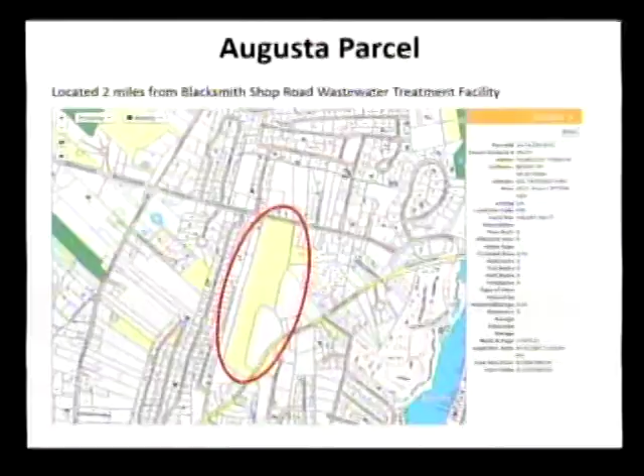One is the town purchased some years ago a 20-acre piece between Brick Kiln Road and Route 28 next to the Falmouth lumber yard. It's called the Augusta parcel, because the Augusta family owned it. It was purchased partly with land bank money and partly with town funds, and the premise was that it would be usable as a discharge site or a pump station, whatever future sewering in the Acapesket Peninsula would require.

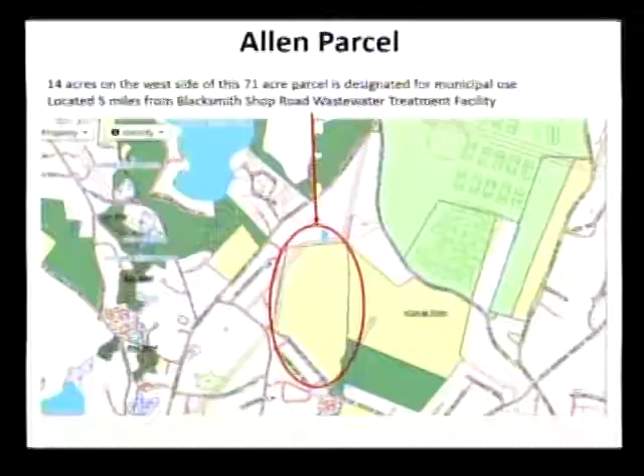There's another site further out, I think about 5 miles from the treatment plant, up near Hayway Road and Carriage Shop Road. It was called the Allen parcel. Mildred Allen sold it to the town for a good price. It was part of a larger parcel the town bought, but 14 acres of it was designated for municipal use. The rest is for conservation. So it's theoretically available for this municipal use.

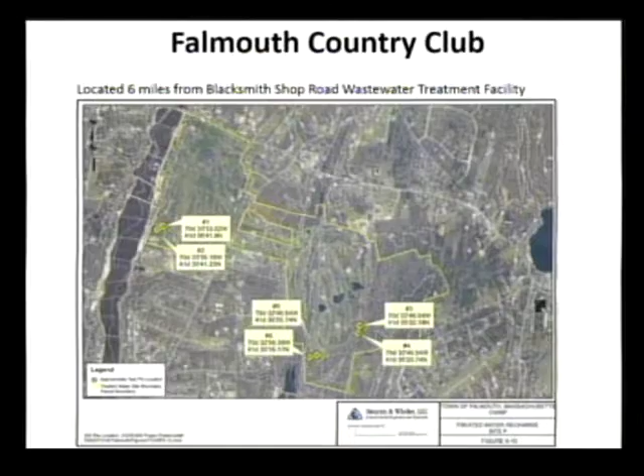The third one is the Falmouth Country Club, which was bought with a combination of land bank money, community preservation money, and town money, partly for recreation, but also with the premise that it may provide a site for some kind of discharge of treated wastewater. This one is 6 miles from the treatment plant. There are others that have been looked at, but those are the three that have gotten the most attention and the most study.

We're here today to talk about two other discharge sites that have not gotten much scrutiny from the town at this point, because they are not in the town. The first one is Joint Base Cape Cod. We're very lucky to have Ed Leonard with us. He's the reason we changed the date, because when Ed could come is when we decided to meet. He's been doing a study for the four Upper Cape towns, funded by the state of Massachusetts, to look at the facilities there, what use they would be to the four towns, what it would cost, how it would be managed, and what the prospects of it in real time are.

So, Ed, you have the floor. Do you want me to go up there for the microphone? That would be fine if someone else can run this clicker. If you prefer sitting, we could move this for you. Doesn't matter to me, I'll do whatever you guys want. Whatever's good for you. Well, let's do this then, because it's easier to see everybody from here.

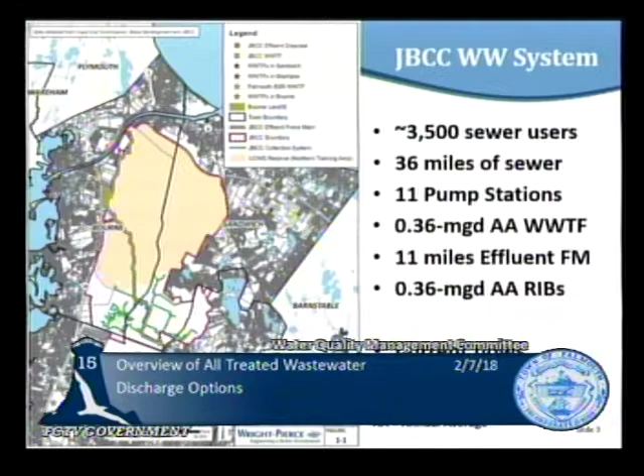Joint Base Cape Cod is about 22,000 acres, bounded by the purple area on the figure here. Of that, about 75% is called the Northern Training Area, which is basically an environmental designation, so without an act of the legislature, it's really challenging to do anything in those acres.

That's about 16,000 acres. The base itself was built prior to World War II for 70,000 troops, so it has a pretty extensive collection system, 36 miles of sewer, 11 pump stations. Things are really spread out on the base.

The original treatment facility, built in the 40s, was a 3 million gallon per day treatment facility. In 1991, that was replaced with a 0.3 MGD wastewater treatment facility. That facility was then upgraded when the Barnstable County Jail was constructed, so the current capacity of the treatment facility is 0.36, or 360,000 gallons per day.

There's an 11-mile force main. The treatment facility is located in Sandwich, actually, and the force main runs through the cantonment, which is the developed portion of the base, through the Northern Reserve, into Bourne, and up to about halfway down the canal.

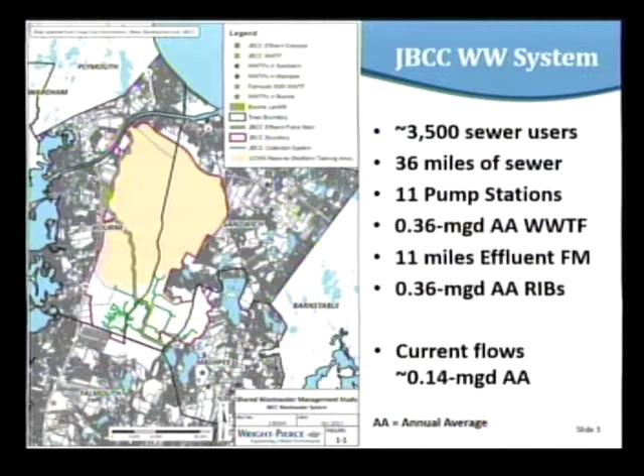So it's on the base, southeast of Service Road. There's no abutters between the rapid infiltration basin site and the canal itself. As I said, those are in Bourne, and those have a 360,000 gallon per day capacity as well.

And those numbers are all on an annual average basis. So the current flows are about 140,000 gallons per day, which means there's only about 220,000 gallons per day of capacity. Each of the towns is looking for more than that in terms of capacity.

So the goals of that project were to identify costs for a shared wastewater approach, and then to confirm whether or not each of the towns individually had interest in continuing to pursue that as an approach.

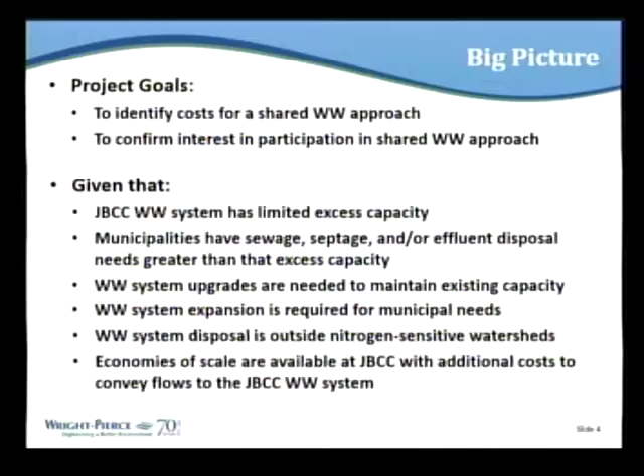Given that there's limited excess capacity, and each municipality has a different set of needs, whether it's sewage, septage, or effluent disposal. The facility itself: the sewers are 70 years old, the treatment facility is 25 years old, so there are baseline improvements that need to be made just to keep it running and reliable.

One of the advantages is the effluent disposal system is outside a nitrogen-sensitive watershed. The canal south watershed has, so far, been determined by DEP not to be sensitive. And certainly there's significant economies of scale available at the base with such a large footprint, and no real abutters in terms of private citizens anyway.

So the biggest issue here is how the cost associated with getting to the location is the biggest differentiator among the towns, and then what we do with it there is sort of the basis of the study.

So we had a working group that was established. Two folks from Falmouth participated, Ray Jack and Amy Lowell. Each of the other towns had representation, including Julian Suso. Each town also had their town manager involved, so Julian was involved for Falmouth. We also had a representative from Joint Base Cape Cod, who was the individual that ran the facilities when he was stationed at the base, as well as some involvement from Mass Development along the way.

We did invite DEP to attend one of the meetings and the commission. They read a pre-draft of the report, so they've chimed in on this as well.

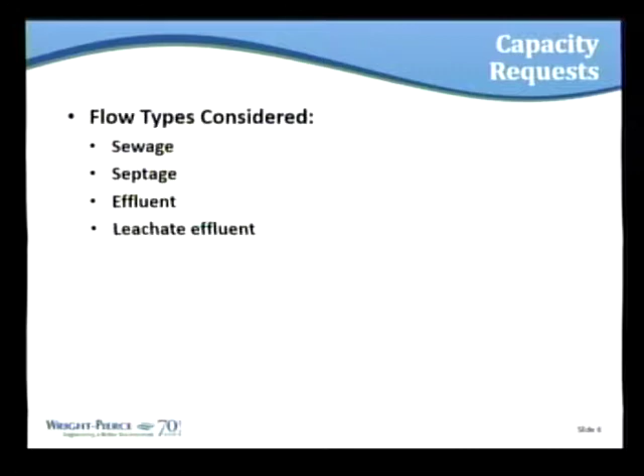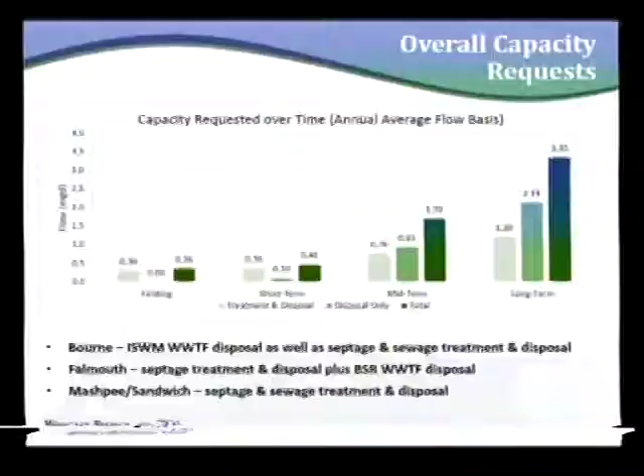So the numbers you'll see moving forward are all in the study basis column. When we added up what everybody was looking for, the existing condition is, as I mentioned earlier, about this capacity. In the short term, there wasn't a lot of need.

Bourne was looking to construct a treatment facility to collect leachate from the landfill, treat it, and send it to the effluent beds. That's most of what the short-term need was.

In the midterm, communities started having more sewer growth or additional effluent from Bourne, some effluent from Falmouth, and you can see those increase. As you get to the longer term, the numbers are quite large, so their effluent disposal is an order of magnitude higher.

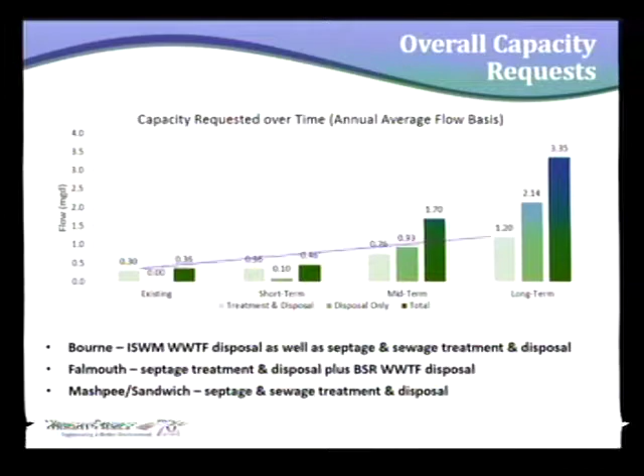So we're looking at about a 4-fold increase in treatment capacity. The lightest color is treatment, and the darkest is effluent, and about a 10-fold increase in effluent disposal.

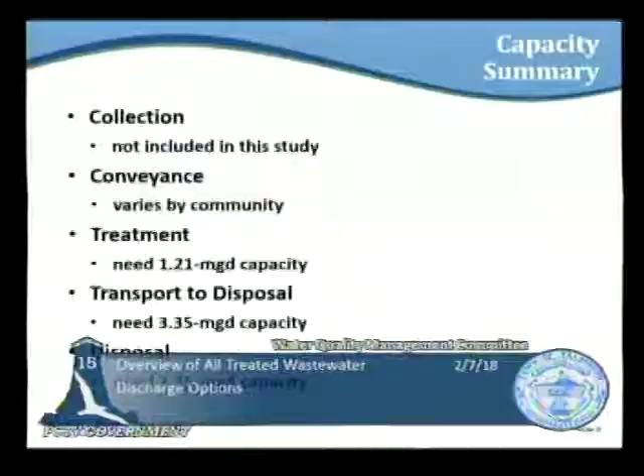All right, so when you added up all those pieces, the treatment was about 1.2 million gallons per day. Transport to disposal, the 11 miles we have to get between treatment and disposal is a significant factor here. And then we have disposal at 3.3 million gallons per day.

We didn't touch collection at all because we assumed that each town would be on their own. Some towns have existing collection systems like Falmouth, others don't.

Conveyance we did include because it was a significant cost. In Falmouth's case, from the Blacksmith Shop Road treatment plant, there was a cost for that pump station, and the pipe to get from there to wherever we connected it in the system.

We did that for each community, and this is a little tough to see, but in the lower left corner, this is Blacksmith Shop Road. We looked at a couple of alternatives to get from there to Joint Base.

We ended up selecting Route 28 to Route 151 to Turpentine Road and connecting. So in that scenario, Falmouth was looking at treated effluent, so we connected to the effluent pipe and ran that the rest of the way.

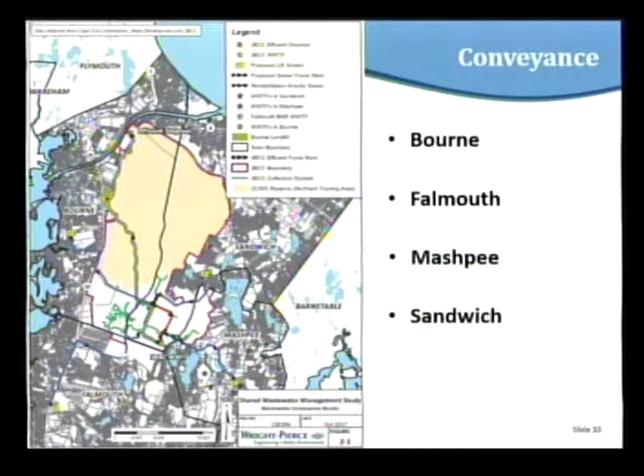The other towns had pump stations, obviously, in their town with their own force mains. In some cases, they were pumping sewage, and in other cases, it was effluent.

Does the existing effluent pipe going through the base have the capacity to take the Falmouth load? In other words, would we have to replace that effluent pipe all the way from the base treatment plant to the discharge site? Right.

So the existing pipe is a 12-inch diameter pipe, and it's sized for basically 360,000 gallons per day on an annual average basis.

So in the alternatives we looked at, we ultimately had 3 pipes going that distance from a cost perspective. We had the existing pipe plus 1 new pipe at midterm and another new pipe at long term.

We can get into this in Q&A, but when you phase projects, it gives you the opportunity to spend less money in the early years, but you may or may not spend a little bit extra in the later years in order to afford the ability to phase it.

So the assumption we made was short term, the existing pipe was sufficient. In the midterm, we added 1 pipe, and in the long term, we added a 2nd pipe.

As Eric mentioned at the beginning, effluent disposal is really the rub here. The type of disposal dictates the location, and we looked at rapid infiltration basins, wicks, which is essentially a gravel well that you put water into at atmospheric pressure and it drains into the aquifer, deep well injection, which is basically a pressurized wick where you pump it under pressure into the aquifer, and then an outfall. We were looking at an outfall to the canal, since once you get over there, you're really close to the canal.

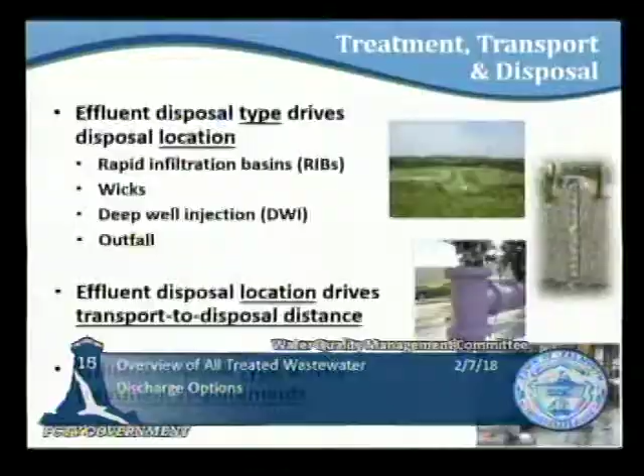Deep well injection was the only one that could have had a short travel distance because of the nature of the method and where the effluent would go once it was in the aquifer. So rapid infiltration basins, wicks, and outfall all had a long travel distance. Deep well injection had a short travel distance. And then the type of disposal dictated the treatment requirements of the facility itself.

So we looked at what we expected a permit to be for each of the major criteria. This rapid infiltration basin column should be pretty close to what most RIB permits are. Falmouth has a fairly stringent RIB permit. As you look at deep well, the ones shaded in yellowish color are either very different, a little different, or very different from what we'd call conventional on the Cape. So deep well injection is quite stringent, and requires much more significant treatment.

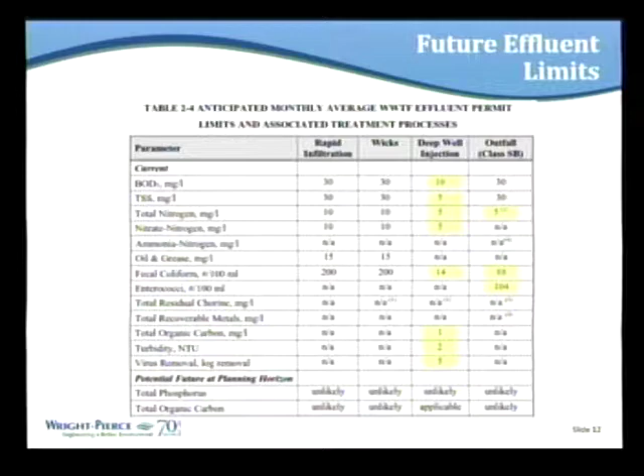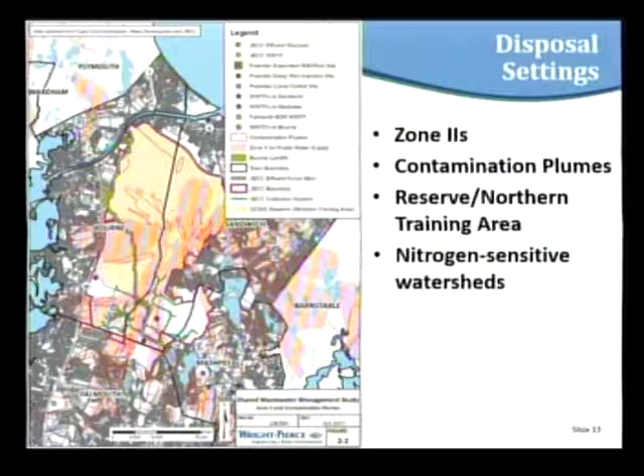So in terms of disposal, we have a lot of overlaying factors at this site. These are really busy figures on the wall here, but everything that's hatched is a zone 2. These funny shaped red outlines are plumes from historic activities at the base. The yellow shading is the northern training area, and anything that's white are the little slivers that might be appropriate for disposal. So there's not actually a lot. And then if you consider what's nitrogen sensitive, it's sort of a different overlay.

So it gets complicated pretty quick, but what we narrowed it down to is that the rapid infiltration basins or wicks at the current site, canal outfall adjacent to the current site, and then deep well injection alternatives near the cemetery and then in the cantonment area.

We looked at 6 different alternatives with different levels of treatment and different lengths of force mains. When you tally all that stuff up, it does not include collection, but it includes conveyance, treatment, transport to disposal, and disposal. All that adds up to $140 to $170 million for those 6 alternatives, and that would need to be allocated to the different towns somehow, but that's the total cost.

We did calculate an annual operation and maintenance cost and a debt service to estimate an equivalent annual cost. Again, that 10.7 million to 16.9 million is for the 6 alternatives for everybody who's in, based on the study basis flows.

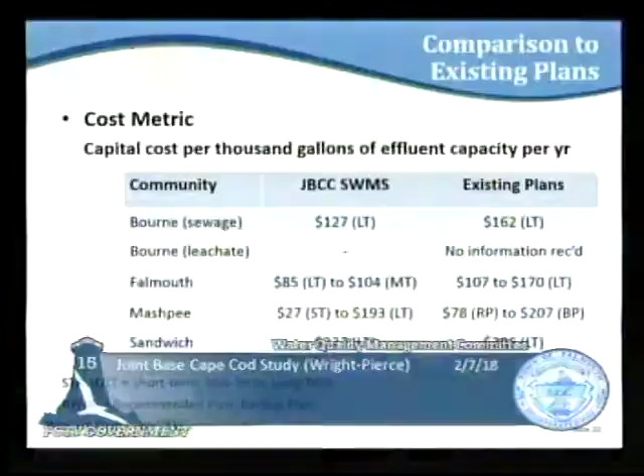We worked with, in our proposal, we had recommended working with the town's designated consultant to sanity check this versus previous planning efforts. Folks thought that was a good idea. Some towns didn't identify anybody, some we were already working with. For Falmouth, Jack had identified GHD, which has done a lot of planning work in Falmouth over the years.

So what we compared this to was the draft CWMP, where there were substantial costs, but it was a broad-based, similar comparison in terms of scope and breadth. We created a metric, because there's already been a lot of numbers in this presentation, so dissecting pieces and parts was super challenging. We said let's go with just capital cost per 1,000 gallons of effluent capacity, which was the only way we could get these things to be comparable.

So from this study, the cost on that metric was $85 to $104. GHD looked at the work done previously and came up with $107 to $170. That was pretty consistent across the board, showing that the economy of scale played a role, and that the distance to convey didn't offset that economy of scale.

So that was a reasonably consistent conclusion. This is a clip from Appendix C of the report, GHD. We had them write a memo comparing things, with appropriate caveats that this was a draft report done a long time ago, and it's not the current version of what Falmouth is proposing.

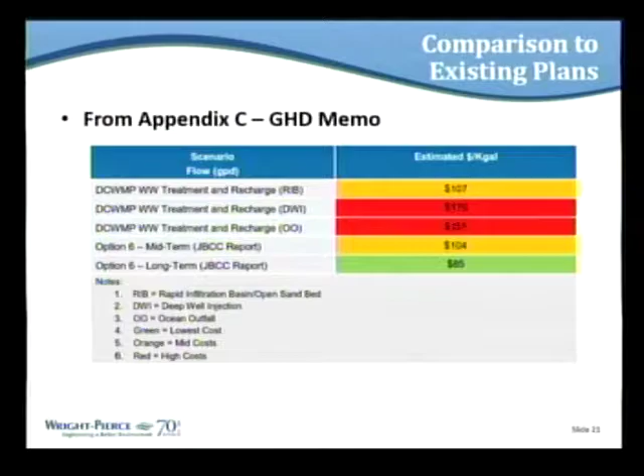It shows that green is the lowest cost, yellow are comparable costs, and red are higher. So the conclusion for Falmouth, based on the information on the table now, is that it's appropriate to continue to consider this as an option. It's not necessarily a slam dunk, but it's appropriate to continue to consider it. That was a consistent conclusion for all the other towns.

So regionalization provides cost savings. The advantages do appear to outweigh the disadvantages. There's certainly a number of challenges that we'll talk about in a minute in terms of actually making this viable.

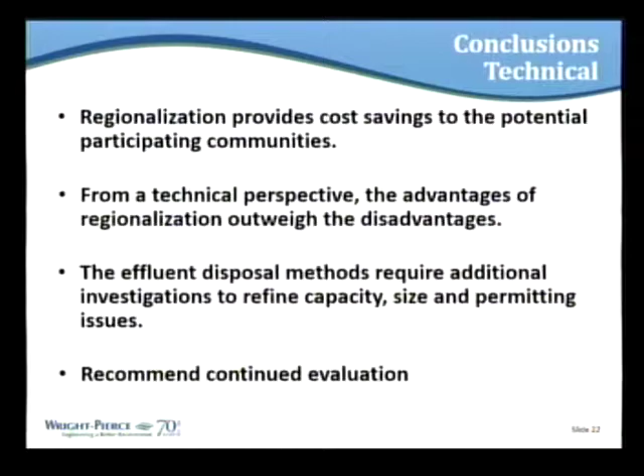There's a number of factors. Each of the effluent disposal methods have their own tripping hazards. None of them are slam dunks. Even the rapid infiltration basins, which are conventional and approvable, there's no place to put enough basins on the land that's available. So we would need adjacent land, as one example. Even the things that are conventional and usual are challenging.

So we recommended continued evaluation. Falmouth and the other towns did agree. They pursued a grant, a follow-on grant. It's my understanding that that was awarded. I haven't seen any paperwork on that yet, but I think that's a good sign.

So then we have the management and policy issues that go with this concept: who will run it, the management entity, the issues associated with having multiple different treatment facilities discharge to one disposal facility, who and how determines how much capacity each town gets and how much they pay for it, and then the necessary intermunicipal and intergovernmental agreements, because you have a federal agency involved as well.

Right now the military owns this base, and they don't really want to anymore. The thought was that we would have an initial management entity take it over. There was some discussion about that perhaps being MassDevelopment, which may or may not happen. In the context of the study, there was an initial entity and then a successor. We may or may not need to go right to a successor.

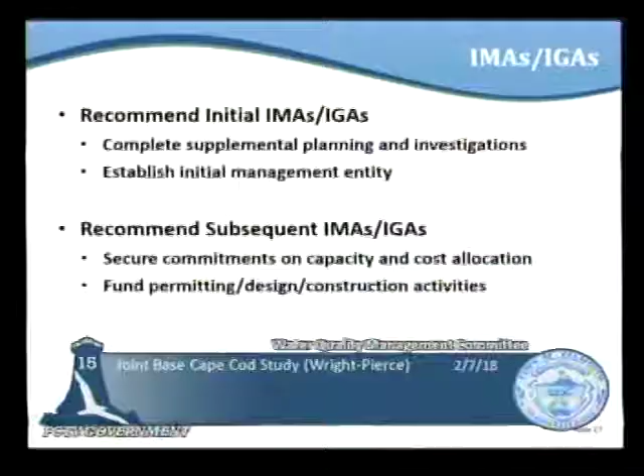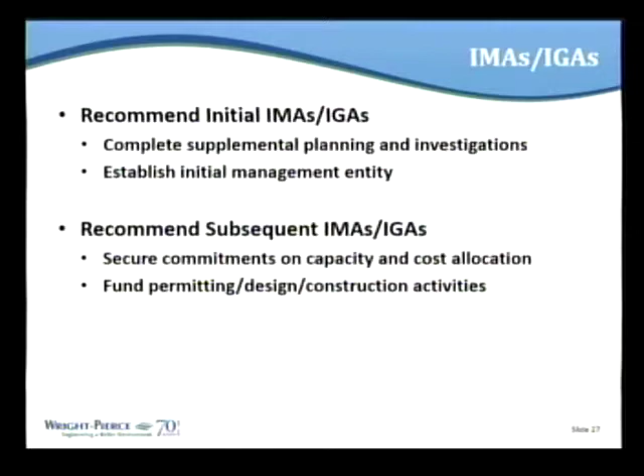We discussed as a working group how to get from here to there, and the consensus was that there should probably be initial intermunicipal agreements to say we want to continue to plan, we're interested, but stop short of any commitment to capital expenditure other than planning level expenditures. Then once it's confirmed, there would be subsequent either collective or individual agreements to say we want this many gallons of capacity and we will pay this many dollars for it.

As you can imagine, if some of the towns said, oh well, that's cost effective, we want more flow, that changes all the math. Or somebody has said we might want less flow. So there's a little bit of—I think this will take a number of times through in order to get to something conclusive.

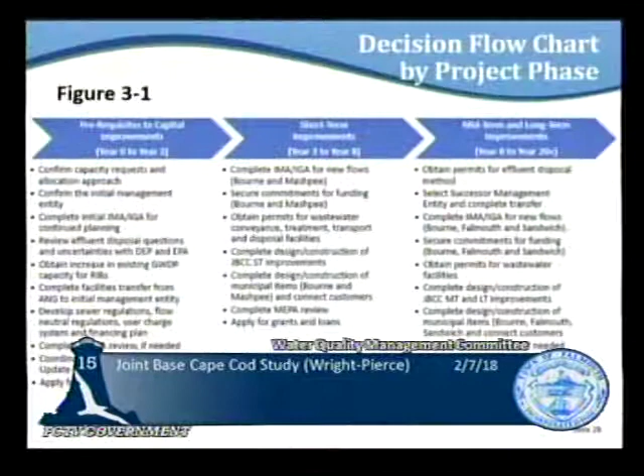I'm not going to try and go through all these—this is a figure in the report. Thank you. There's a lot of steps. If I convey one thing, it's feasible but complicated. There's a lot of boxes to check, and this is figure 3.1 in the report.

The next steps were, we were trying to get actual letters of support, and there was some debate about whether or not people ultimately wanted to do that, but everybody agreed it was a good idea to pursue another grant. I believe that has happened—the last one was the Commonwealth Efficiency and Regionalization Grant, I think through EEA. And then there's a number of steps for individual towns to take on their own, and lots of discussions. We're good at that.

So I have those slides. I have some other ones anticipating questions. Well, we do have questions—let's start with Matt.

What did you assume in terms of treatment level for the sewage that would be pumped up to the base? It varied by alternative. For the rapid infiltration basins, it was simpler than what you have at your facility now. We assumed enhanced nitrogen removal, an SBR—sequencing batch reactor like Falmouth has—sized for nitrogen removal to 5 milligrams per liter, but we did not have denitrifying filters because at that location you shouldn't need it. In your current location, you do.

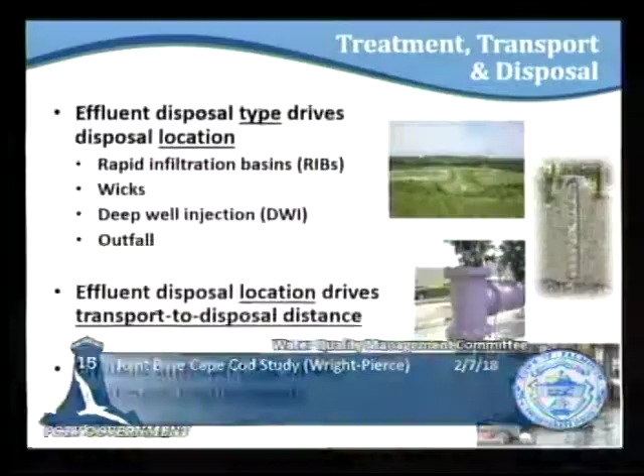So you would have a casing a certain distance down, and depending on how big it might be, you would drill it, fill it with gravel, and then you have to have the ability to purge it and disinfect it, because you'll get some biological growth on the stone in there. But effectively it's creating a pathway through any semi-confining layers to get it to open up a surface area that's vertical as opposed to purely horizontal.

So it's like a leaching field, except it goes straight down. Yeah, like our old leaching pits. Right, so West Island has had those for a number of years. Off of Fairhaven. And they had initial problems with it, I believe. Well, and what is the downside, and what happens when you?

The downside is, imagine trying to maintain a leach field that was drilled vertically into the ground, and you only have access to whatever, 72 square feet of it. And there's some concern with the accumulation of chlorinated compounds at depth too, right, if that's what you're going to clean it with. Yeah, you wouldn't apply chlorine to it routinely. You would do it just like you would do a potable purge. Yeah, you've got to shock them sometimes to clean them out.

And the casing material on the wick? It's only porous at depth, right? Correct, yeah. In the upper part, you would have a precast concrete access around it, but then a steel or stainless steel casing, depending on what you wanted. And how far down does it go? It depends on the hydrogeology. You need to get through the confining layers.

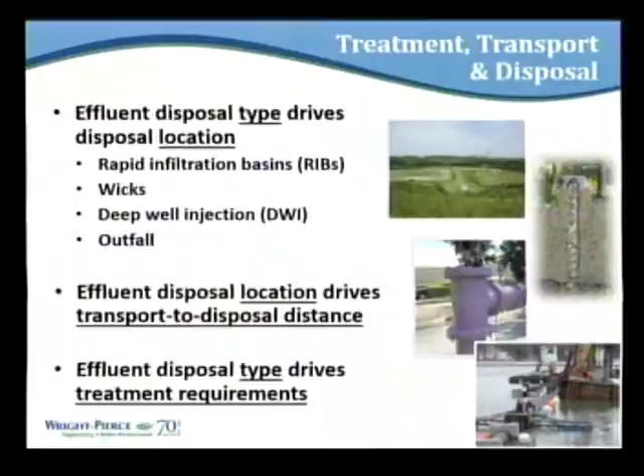It's a little tough to see in this picture, but this one has... they often have like a precast structure around it that wouldn't look all that different from a manhole. But you could put it flush with the ground, put a hatch on it, you'd just need enough room to work in there, so maybe that stuff's a little bit lower.

There are several wicks at, I don't remember the name of the golf course in Hingham, one of the higher end golf courses in Hingham, and it's in the woods between fairways. Hingham, Tisbury, West Island, and Orleans, maybe. So, okay, well, that's good to know.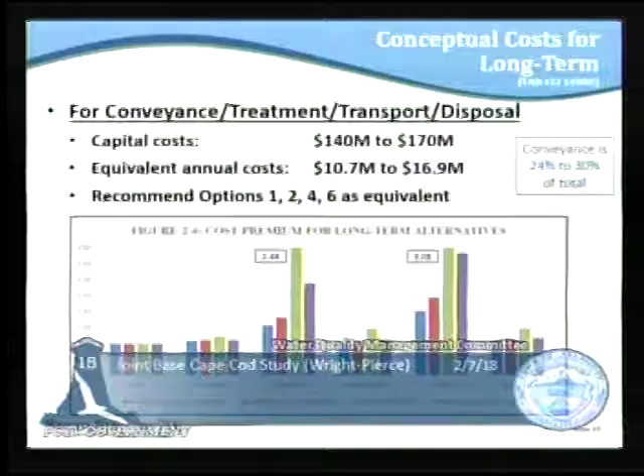This chart shows annual O&M in green. So there's a little bit of difference. The wick well is maybe 8% more than the RIB. The outfall is maybe just under 10% more. Those are in the same ballpark - we tried to minimize the complexity of that analysis. And the deep well injection is just a lot more expensive.

And what was the annual, was it 40,000? 440. That was Falmouth's share in the midterm. So that would be in addition to the cost of capital - almost $500,000 annually.

I forget the numbers of how far Falmouth is to the junction, but Falmouth would be pumping more than 11 miles to get to that location. So it's not insignificant - a good bit uphill too, undulating, and that would include electricity costs. If Ron were here, he'd be pointing that out.

So, any other comments or questions? Listen, we really appreciate you coming - this is our next door neighbor, and it's good to know what's going on up there, and that Falmouth's a part of it. These numbers are a heavy lift.

They are, yeah. And I guess the context for these, compared to the old numbers, is as broad - it's distant planning as well, so hopefully this is helpful. I appreciate the opportunity to come. We're looking at anything and everything short of sending it to outer space - talk about a heavy lift. Anything else is on our radar screen, and we're very appreciative that you've done all this work.

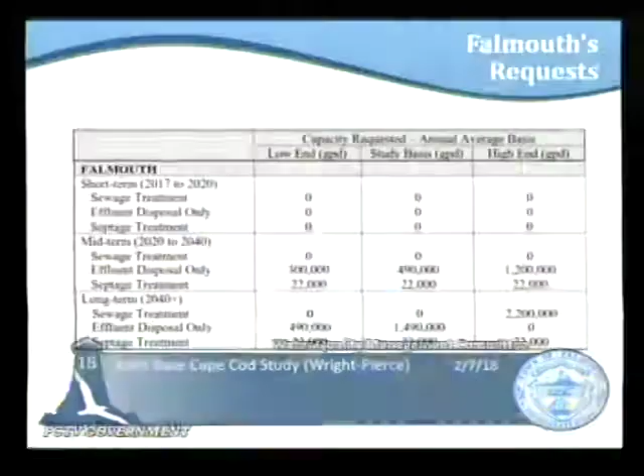The only reason it was in the report - I'm trying to get back to that table again - the study basis column, the center lane, is what we did all the costing based on, and that was the likely alternative. We asked each town to consider what the outer bounds of that might be, and given that each facility requires significant investment every 20 to 25 years, that was the left field approach to that.

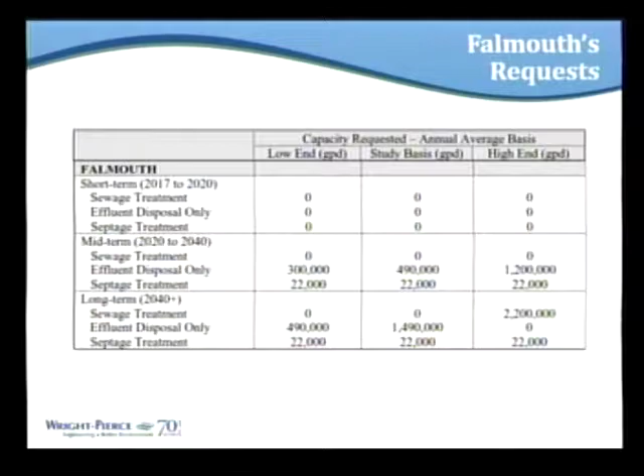So this study doesn't say you should do that. It just says, if in fact there was some point in the long term where you might ask for a really big flow number, what might that be? And in the interim, if we wanted to maybe access just our new areas and keep our plant in place, there was nothing preventing us from doing that.

This is just a long-range view, correct? Correct. What we did carry forward and what was requested for this analysis was to keep the facility that you have, continue to dispose of effluent in the manner that you do for the collection area that you have, and then for additional sewerage you would need to collect - whether for business, economic development, or nitrogen abatement - that portion of the flow would go north unless you can find something else in town.

And could you tell me again what was the existing excess capacity that they have there now? At Joint Base, it's about 220,000 gallons a day on an annual average basis. Not very much, no. I think that's a fairly common misconception that there's a lot of capacity there - there's a lot of acres there, but there's not a lot of capacity there. There was in the 40s, but there isn't now.

Right, yeah. Any other comments or questions? Okay, well again, thank you. This man has to go all the way back to Maine, so we won't keep him any longer, but we really appreciate you coming. Thanks.

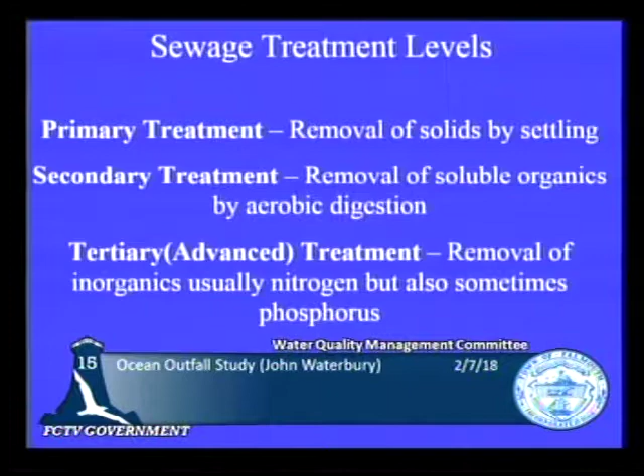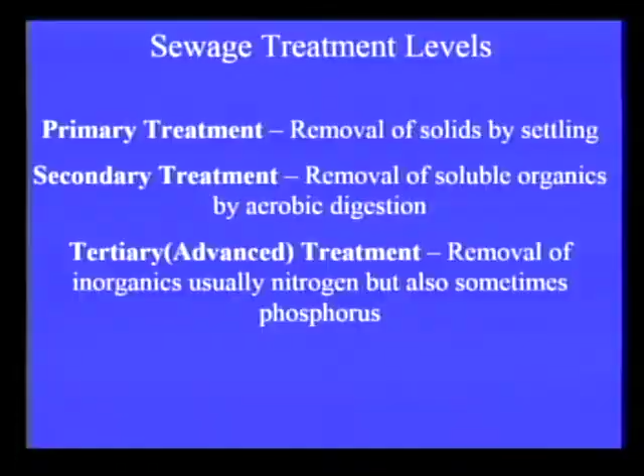Then there is tertiary, or advanced treatment, I'll use those two terms interchangeably, where after primary and secondary treatment you remove inorganics, typically nitrogen, but also sometimes phosphorus. The nitrogen removal is done by a series of bacteria, with the result that the nitrogen end product is N2 gas that goes off into the atmosphere, which is how we get it out of the treatment stream. Typically that process can get about 90% removal with just the microbial processes.

Phosphorus can either be treated microbiologically or chemically. We traditionally here have not worried about phosphorus yet.

So the question I'm posing is, why should we consider an ocean outfall on Falmouth? Is that something that's reasonable for us to think about? Eric sort of started this discussion, and the reason I put this map up is because it shows you we have 15 coastal embayments that are variously impacted by nitrogen. 75% of that nitrogen which is impacting us comes from septic systems.

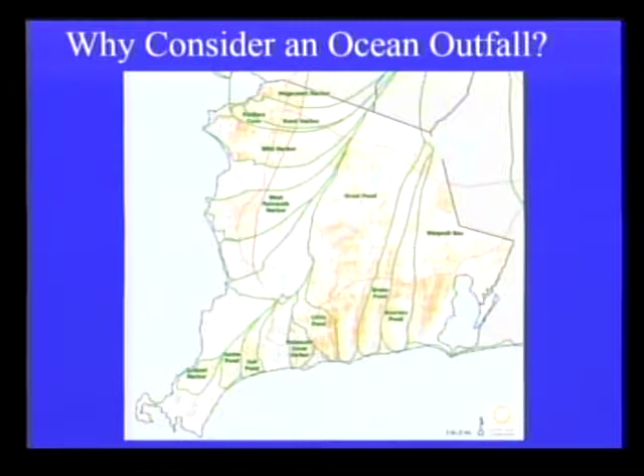If you just look at our West Falmouth treatment plant, sitting right where it says West Falmouth Harbor, when we built that plant in 1985, it was a secondary treatment plant, so it did not remove any of the nitrogen. It ran for 20 years with no nitrogen removal. The result was, with a series of infiltration beds at the plant plus spray irrigation, the plume that was generated went west and impacted negatively our West Falmouth Harbor fairly significantly. In 2005, we upgraded that plant to a tertiary plant that makes 3 milligrams per liter nitrogen, about 90% removal. We still haven't seen that plume wash through.

And so I would argue that any place we think of putting our discharge upland, away from the water, even when we denitrify to 90%, the remaining 10% ends up impacting our coastal water bodies. So we really need to think about how we can bypass that upland discharge.

If you think about our West Falmouth treatment plant, we know we have a plant that can treat 1.2 million gallons of water a day. But the state's only letting us discharge 700,000 gallons a day, because they don't want us to negatively impact the coastline with even our 90% removal. So we're really sort of hamstrung on discharge.

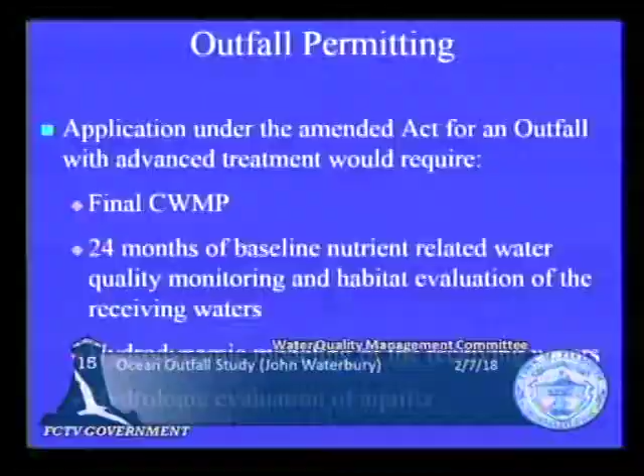Typically the criterion used is one from EPA: you map the 1 to 1,000 dilution of an outfall, which is what EPA considers the area that will be impacted by shellfish. So if you have an outfall of X million gallons per day at a certain concentration, you use those models to predict how much of an area within your receiving waters will be impacted at the point where you've diluted that effluent 1,000-fold. Once you've done that, the fourth criterion a municipality would have to show involves the aquifer—you'd have to demonstrate that the recharge characteristics of the aquifer would not be negatively impacted by the discharge of that amount of fresh water.

To look at a hypothetical, I'm going to use the Boston outfall as an example to compare to what hypothetically we might consider in Falmouth. The Boston outfall went into service in 2000. It discharges 350 million gallons a day of secondary treated water—not advanced treated water. That results in 12,000 tons of bioavailable nitrogen put into Massachusetts Bay every year.

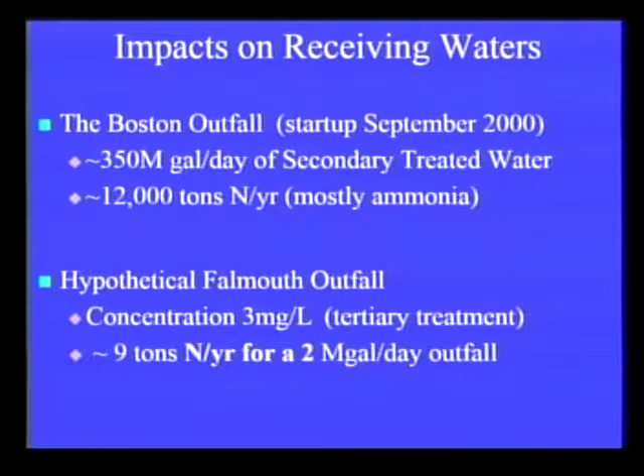If theoretically we were to think about a 2 million gallon outfall for our receiving waters in Falmouth, treated to tertiary treatment level—which is what our West Falmouth plant does—with a discharge concentration of 3 milligrams per liter, that would result in a nitrogen input to our receiving waters of 9 tons per year. Think about the difference between 12,000 tons per year and 9 tons per year.

So if we're thinking about an outfall of 2 million gallons per day at 9 tons per year, I think you won't be able to find an impact at all. We'll chat about that a little more in a minute. At this point, I think you can make a pretty good case that we could do a 2 million gallon per day outfall in Falmouth without impacting our receiving waters to any significant amount.

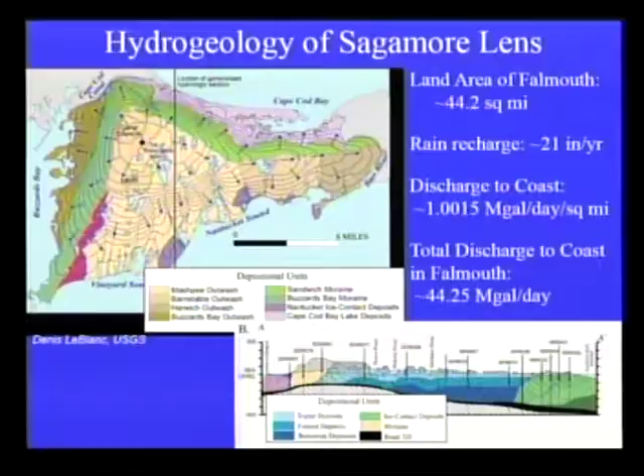I've done a calculation for us to see how much fresh water that is. The land area of Falmouth is 44.2 square miles. The rain recharge is calculated by USGS at about 21 inches per year, and that's a very conservative number—it's probably closer to 24 or 25, and that's after evaporation, so that's what's actually getting into the groundwater. That means that for every square mile of Falmouth, every day we discharge about 1 million gallons of water just from going through the groundwater. So if you calculate the area of town, every day our share of the aquifer is discharging 44 million gallons a day, going into our coastal ponds, into our streams, and just being discharged at the coast.

So I think it's fair to think that if we're then discharging 2 million gallons per day of that 44 million, we're really going to have a minimal impact on our sole source aquifer, and probably no danger of saltwater intrusion from that. For people at home, that's even brought home more clearly if you think about our Coonamessett River: in March it discharges 9 million gallons a day, in June 6 million gallons a day. So if you think about that in reference to a 2 million gallon a day outfall, I think one can feel fairly comfortable that our aquifer can handle that.

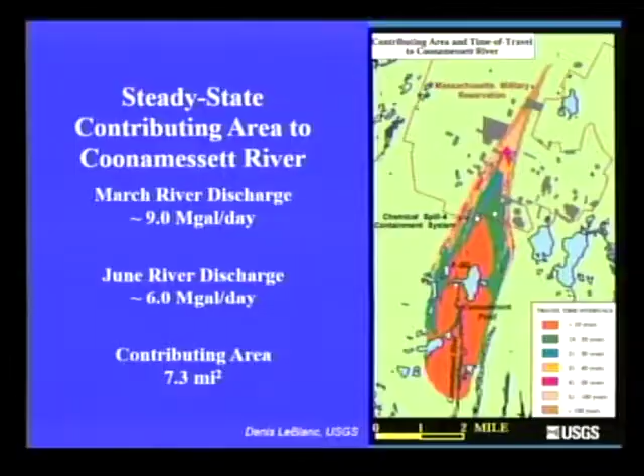The other thing I thought instructive to think about with our aquifer: by far the greatest impact we have on it is the withdrawal of water for our drinking water and moving it all over the aquifer. So there are the wells in the Sagamore Lens around us.

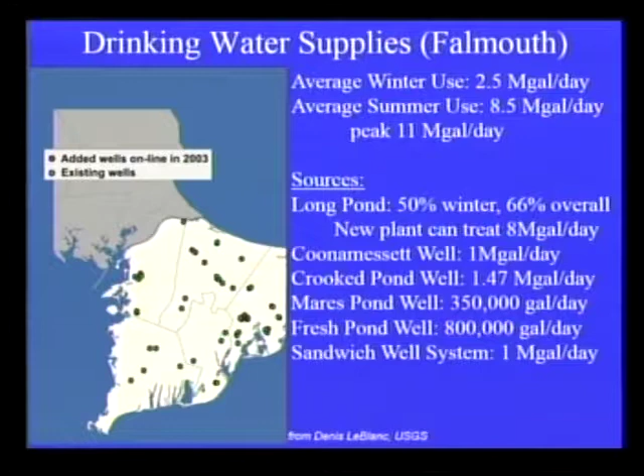If you look at our water usage, during the winter we withdraw about 2.5 million gallons a day from the ground. In the summer, it's about 8.5 million gallons a day. Peak days in July and August can get to 11 million gallons a day.

And then there are our sources. For instance, our new treatment plant, which we've just started, will treat 8 million gallons a day. If you think about us withdrawing that amount of water from the aquifer and moving it all over town, then think about a 2 million gallon a day outfall, that pales by comparison to what we do to the aquifer to provide ourselves with drinking water.

So that's the finish of the slides I had. I did want to mention that no one has yet made a formal application for an outfall. But the towns of Wareham, Buzzards Bay, and the Mass Maritime Academy have begun to think about a 10 million gallon a day outfall at the Maritime Academy in Bourne.

The reason that's being done is a project the Coalition for Buzzards Bay is helping with. The wastewater treatment plant in Wareham is on the Agawam River, and it's a tertiary treatment plant. It discharges at 3 milligrams per liter into the Agawam River. But that discharge, again, like our West Falmouth discharge, is enough to degrade the Agawam River significantly.

At the moment, the Maritime Academy has a little outfall of fairly untreated water going into the canal. The plan is to pick up Main Street in Buzzards Bay and the Maritime Academy, take it back to the treatment plant in Wareham, treat it to 3 milligrams per liter, and then bring everything back and discharge it at the Maritime Academy at 10 million gallons per day.